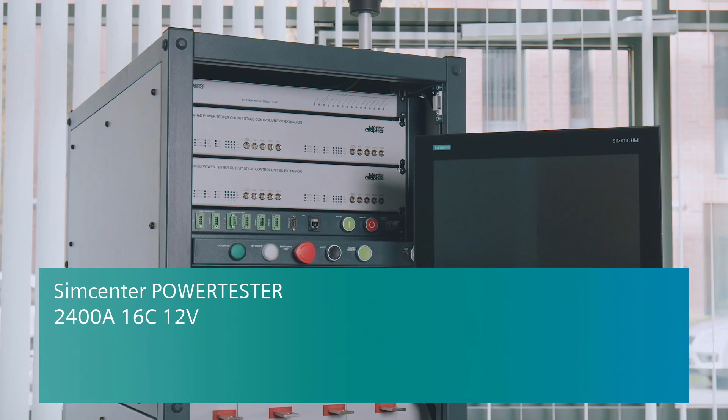Power electronics components have become one of the most important building blocks for modern electronic systems used for driving electrical motors or for converting energy from AC to DC or vice versa. Their consistent operation influences the reliability of the final application, such as the drivetrain or braking steering system of an

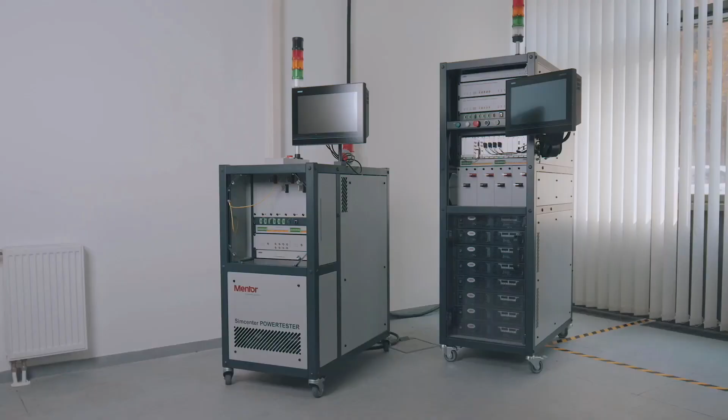electric vehicle. The Power Tester was designed to address thermal challenges of semiconductor components and modules such as diodes, IGBTs, silicon and silicon carbide MOSFETs. It offers both high-fidelity thermal characterization capabilities to understand the device thermal performance and active power cycling to help estimate the lifetime of a device.

When performing these in an automated combination, the result is useful data on lifetime and failure mechanisms from a single test sequence. Analysis and thermal simulation are supported by a thermal model generated by the test and represented by the so-called structure functions. These can also describe performance of important structural layers inside the device and help locating structural thermal failures.

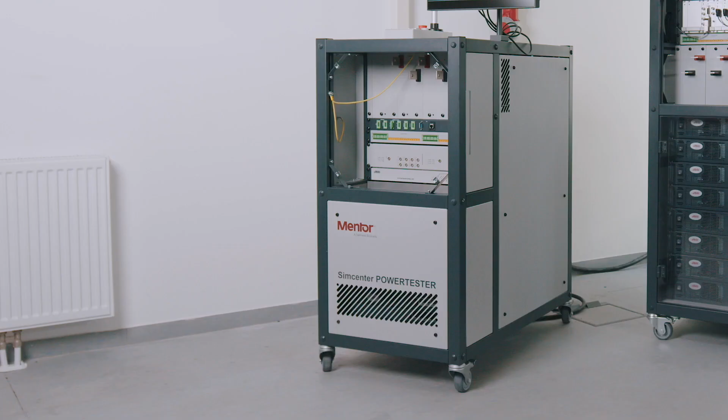My name is Zoltán Sárkány. I am a product manager responsible for the design and development of Siemens Simcenter Power Tester series of products. We offer different versions of the measurement station covering device ranges from 10 to 3600 amp of current. In the next few minutes, I'm going to show you the operation of the Simcenter Power Tester through a measurement

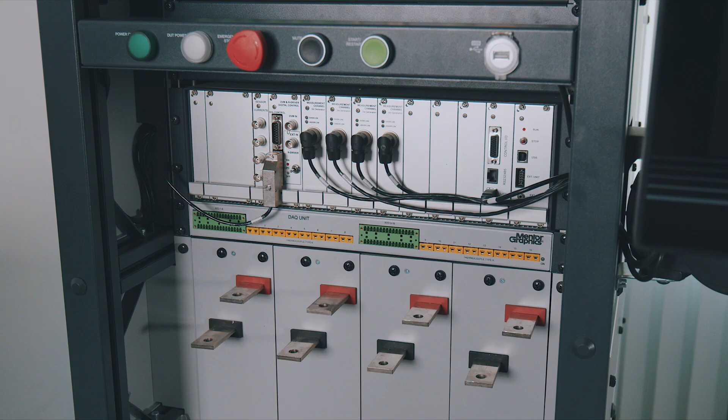example. The system we are going to review today can output maximum 2400 amp via four 600 amp powering channels with output voltage up to 12 volt. The system is capable to test up to 16 devices. 4 of these devices are connected in series on each of the 4 heating current outputs. Measurement current is available for each heating current output and dedicated gate drive output is available for all devices.

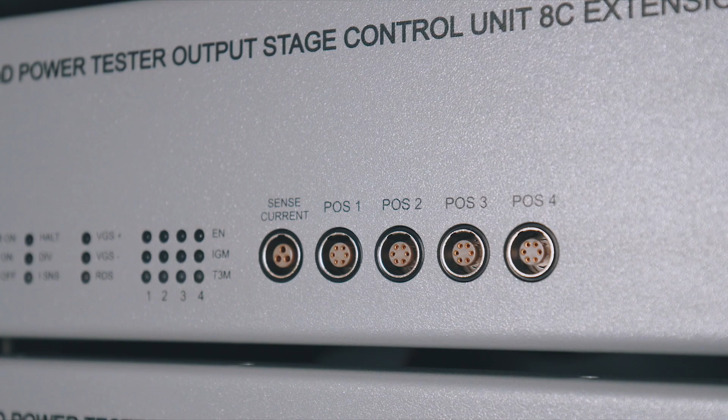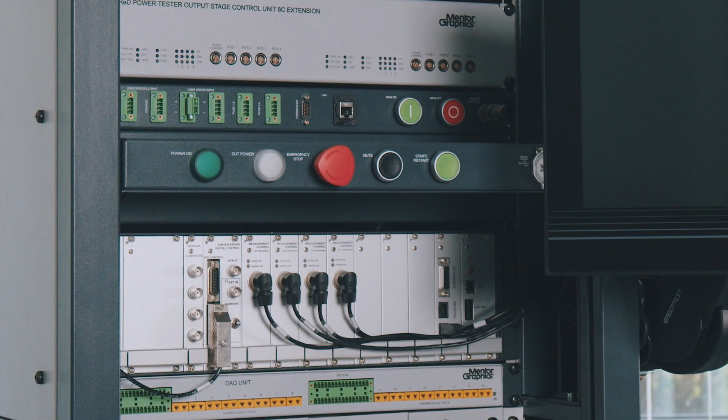This power tester contains no cold plates or closed measurement space. It is built into a 19-inch rack, which allows minimal system footprint and facilitates simple connection to external measurement environments. The system has a dedicated serial communication interface to connect the chiller, to provide regulated coolant temperature and carry out

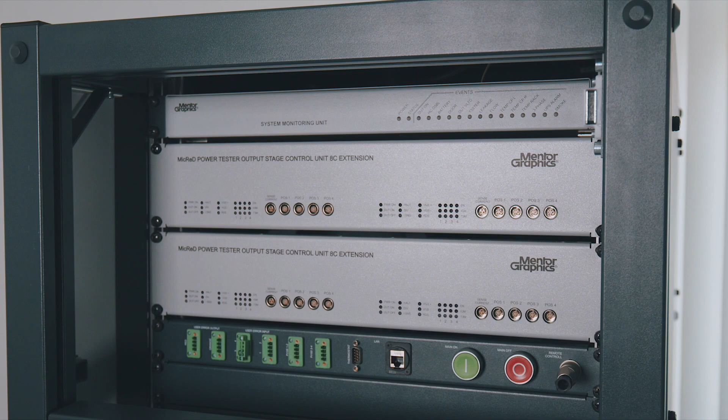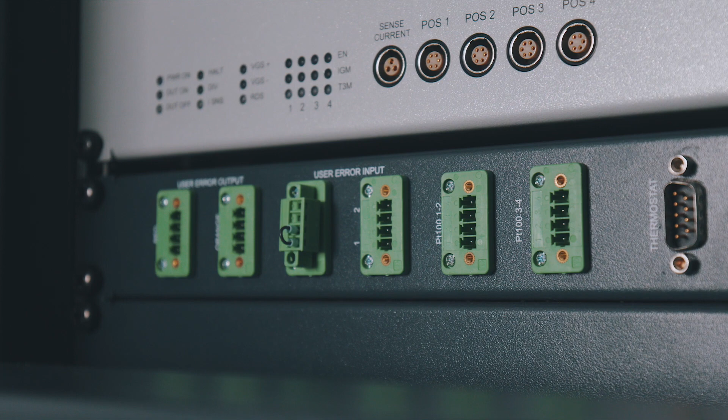automatic temperature sensitivity calibration. The high current operation, of course, requires dedicated safety sensors and mechanisms that allow autonomous operation without constant supervision and provide alarms or even shut down the power tester in case of critical safety events. There are dedicated safety sensor inputs available, so you can connect it to your measurement environment and set it up

in the control software. The system has a built-in control computer and provides an easy-to-use touchscreen interface for easy operation. This covers the full workflow from the device definition to the actual RTH measurement or power cycling. The system's primary application is testing silicon and silicon carbide diodes, IGBTs and MOSFETs.

Let me show you the measurement workflow for two 2400 amp IGBT devices connected in series. These devices have a classic package with flat cooling surface. We are going to use a cold plate with universal screw fixture to attach the devices. These packages contain a single IGBT transistor each. We are going to connect all the 4 heating current outputs in parallel to supply the required heating power.

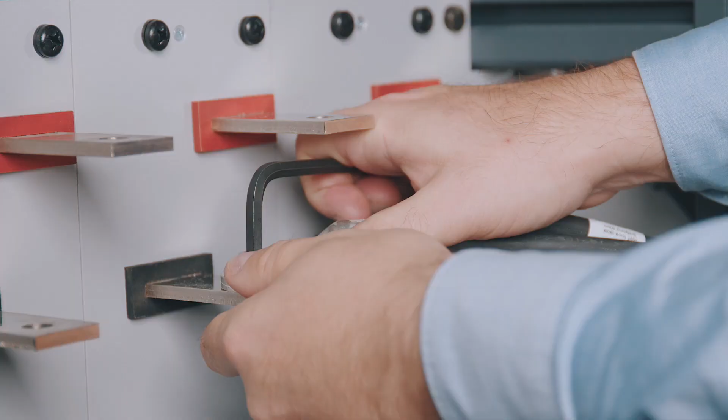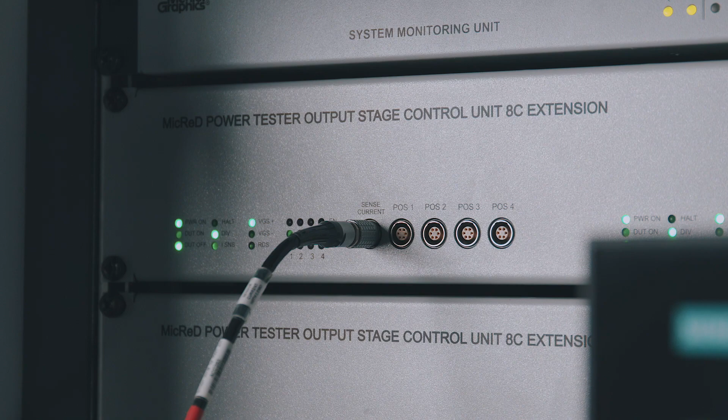The high current connections and measurement current cables need to be attached to the top and bottom of the device chains. Gate drive outputs and voltage measurement inputs are combined in a single connector to facilitate clean and simple wiring. The color coding of the banana plugs and the labels on the cable ends help in the connections. No other connections like thermocouple or other temperature sensors are needed for the junction temperature measurement.

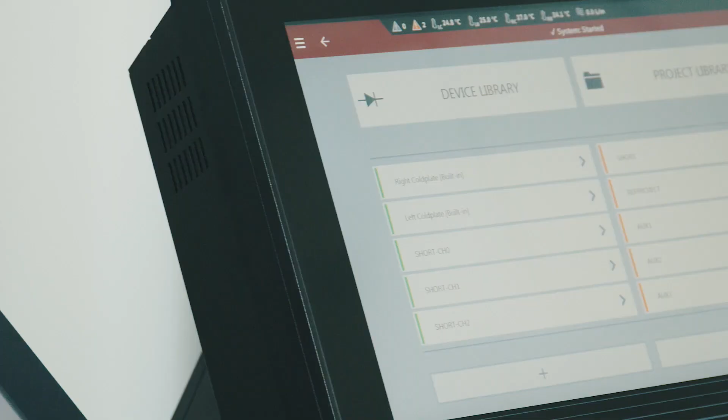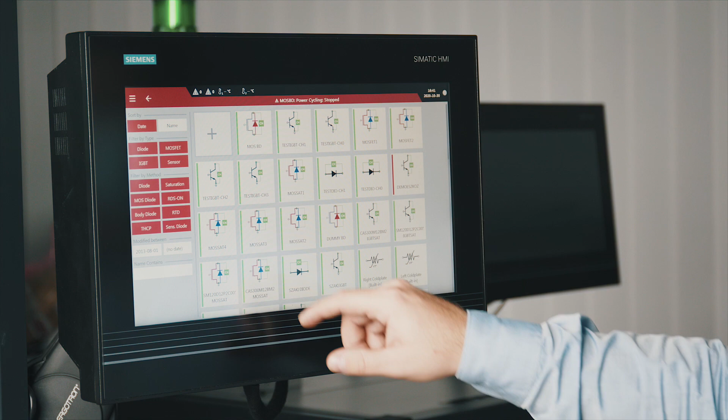The test setup is organized at 2 levels, devices and projects. Device definitions contain the most important parameters of the test samples, while the projects define the arrangement of these devices and the actual parameters. We need to define a new device for our sample. First, the measurement mode has to be selected. In the current example, the IGBTs are heated and measured in saturation mode with a constant gate emitter voltage applied to turn on the devices.

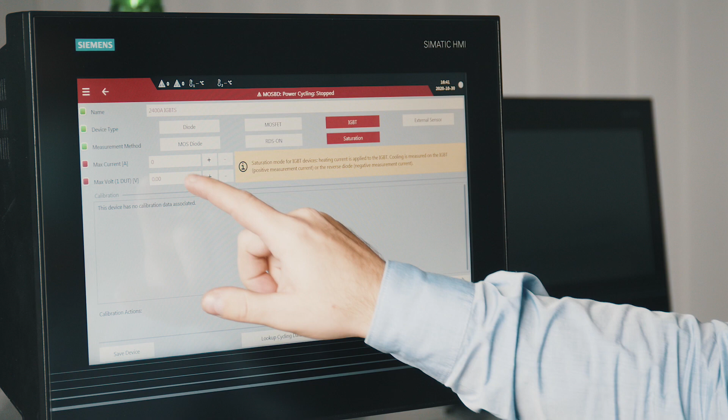Then, a few important parameters like maximum load current need to be defined, which are easy to fill based on the device datasheet. As temperature is captured by an electrical measurement, the accurate temperature sensitivity information is essential for calculating the junction temperature from the measured voltages. The system also provides the option to import or simply type in the temperature sensitivity value. Here we need to define the gate voltage and sensing current parameters for each device, the desired calibration temperature range and step size.

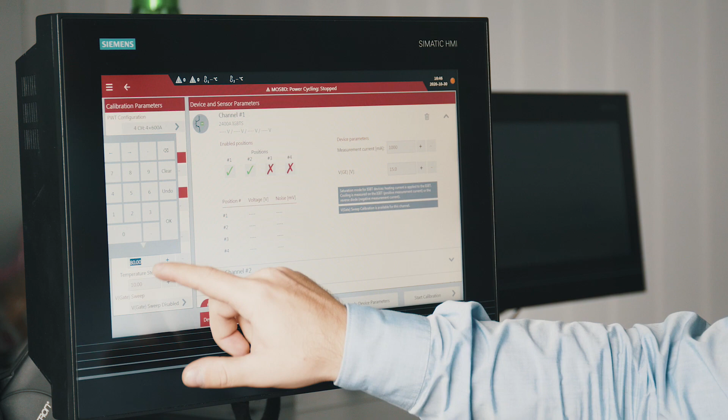During the temperature sensitivity calibration, the system automatically controls the chiller temperature and captures the device voltage as a function of temperature. At the end of the process, you can select what type of fitted curve to use for the transformation. Linear or higher order polynomial or exponential functions are available.

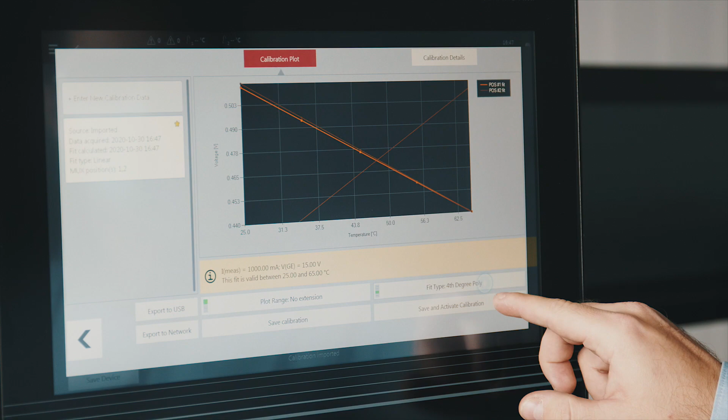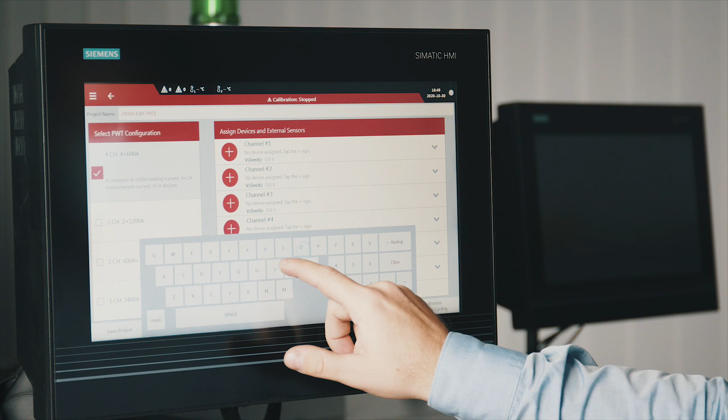Once we have the DUTs calibrated, it is ready to be used for thermal transient testing or power cycling. For this, we need to create a new project. We need to give it a unique name, select the appropriate channel configuration to handle all 4 outputs together as one 2400 amp current source and assign the device we previously created.

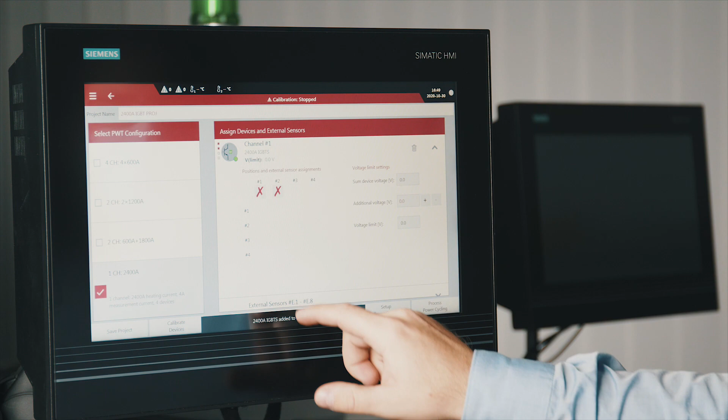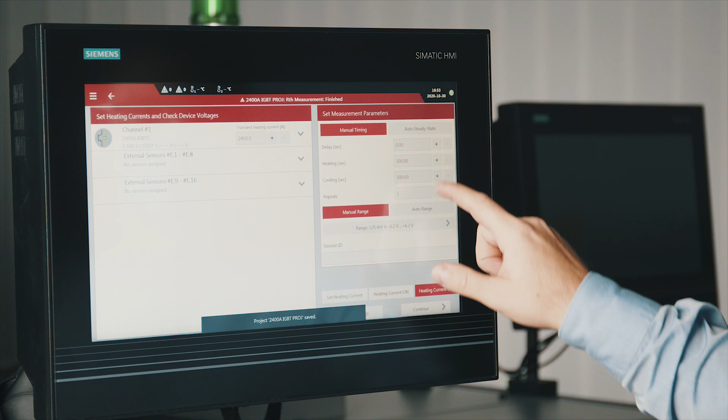Thermal transient measurement can be initiated by selecting the Setup RTH measurement function. The desired heating current level and the measurement timing parameters need to be filled. You can freely configure heating and cooling time. By clicking Continue, the measurement will start. First, the system heats up the device. Then, after the set heating time, the heating is turned off and the thermal transient is measured.

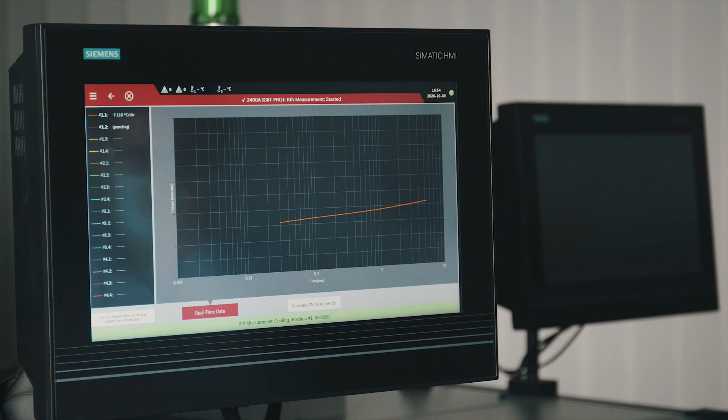You can view the preliminary results on the power tester, but the actual post-processing shall be done on a separate PC on exported results. The thermal transient curve measured by the system and the structural information extracted with the post-processing of the captured data can be utilized in various ways. Standard thermal metrics provided in datasheets like junction to case or junction to coolant thermal resistance can be created or verified utilizing the transient dual interface method.

By repeating the same measurement with two different thermal interfaces or flow rates, the two thermal transient curves will overlap until the heat reaches the changed interface. The desired thermal resistance can be read at the divergence point of these two curves.

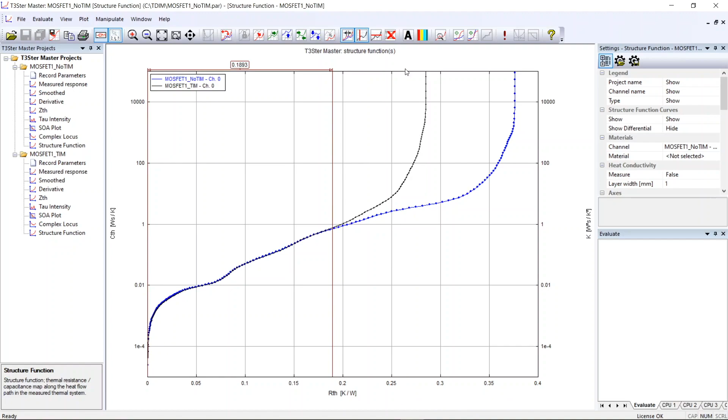The extracted thermal RC network can be used to generate a compact thermal model for simulation purposes or serve as a reference for the fine-tuning of detailed 3D thermal model parameters. The resulting model will serve accurate temperature not only in steady state but in time-dependent simulations as well. Finally, the structure function model can help understanding the thermal performance of various structural layers inside a package, compare different technologies or process parameters, and hence optimize packaging technology.

The main function of power tester systems is to carry out power cycling tests combined with RTH measurements. The system is capable of automated power cycling compliant with current automotive qualification guideline AQG 324, but provides control and monitoring functionalities beyond the standard requirements. The integrated thermal transient measurement capability enables repeated, non-destructive structural analysis throughout the power cycling process and automatically follows the degradation of various structural layers inside the package.

Basic test parameters like heating current and timing parameters need to be defined. We can configure the automated thermal transient test and optionally gate current measurement feature as well. There are various cycling control strategies defined in the control software. I can select how the system shall regulate the powering parameters with the device degradation.

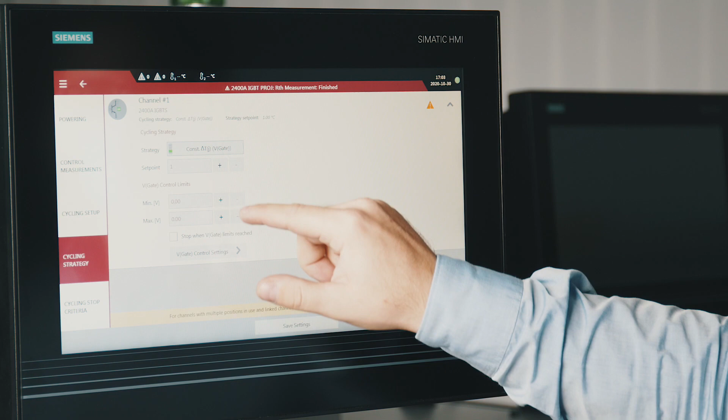Current testing guidelines prescribe using fixed heating current independent of the device degradation to best mimic the real usage of the components, but there are optional methods to ensure constant junction temperature change or constant power step by regulating the heating current or gate voltage as well. Finally, the cycling stop criteria needs to be defined. The system monitors several parameters in each cycle, and if they exceed a certain threshold, the cycling is stopped automatically.

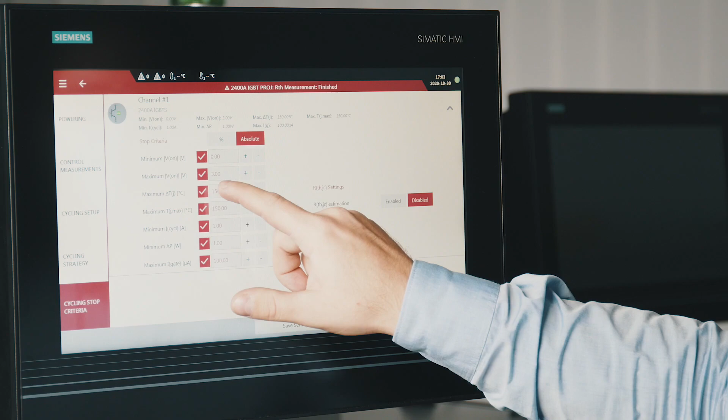Once the power cycling started, it will run automatically for days, weeks or months until the set maximum cycle number or another cycling stop criteria is reached. One of the most important outputs of the power cycling test is the component lifetime, the number of cycles elapsed until the failure of the device. This information can be used as input parameter for lifetime model fitting or ultimately lifetime calculation based on mission profile descriptions and simulations.

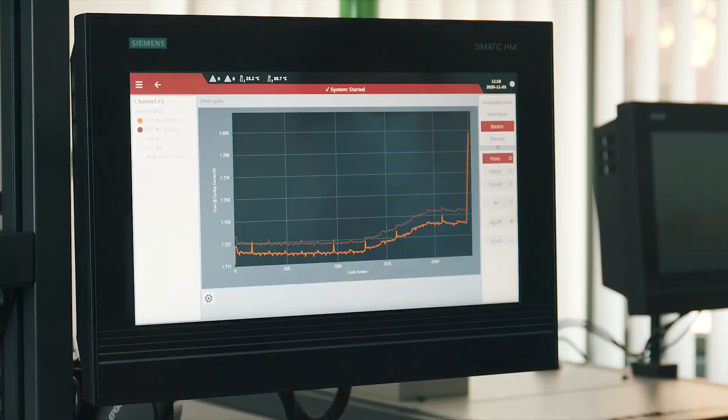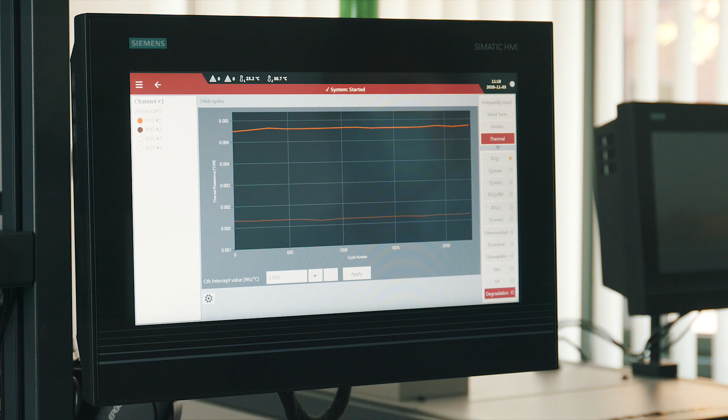However, the additional parameters such as on-state voltage, gate current and thermal resistance measured and monitored throughout the power cycling test are essential in verifying that the failure mode observed during the cycling matches the experiences in real-life conditions. Moreover, the thermal transient test results and the generated structure functions can help understanding how the structural defects develop. It can be used to identify root causes of failure and weaknesses of the structure and hence providing useful feedback to the development.